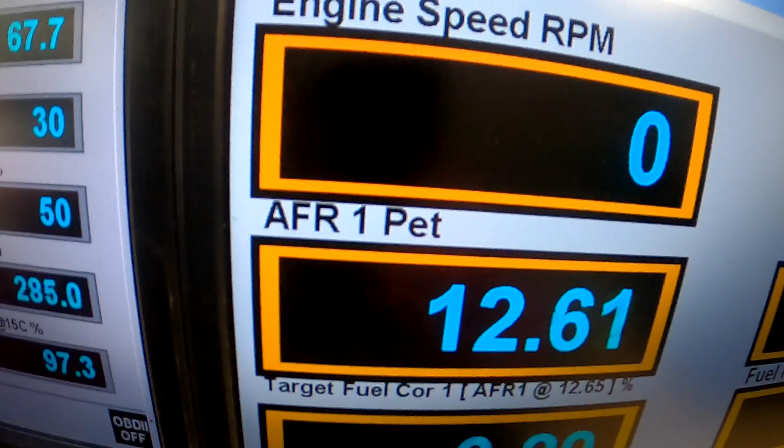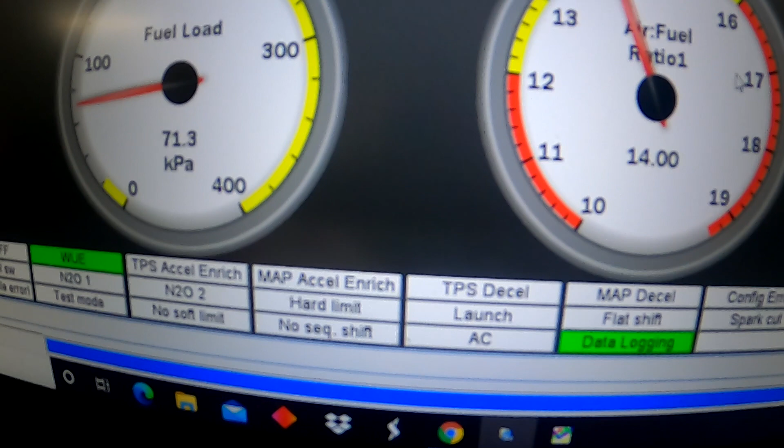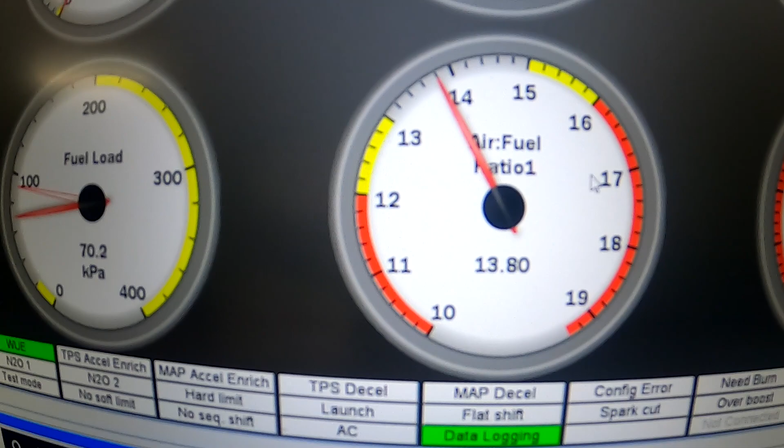Alright, so problem number one, I didn't have a whole lot of faith in the wideband that's in the car. Mine's reading basically 1250 or so, 1260. I'm reading like 14, 13. Now it even looks like it's stuck. Widebands aren't even on the same planet as one another. I know mine's good, so I'm just going to turn off any closed loop we got going on with this one, and I'll just use mine. So just that in itself is probably going to make a pretty big difference.

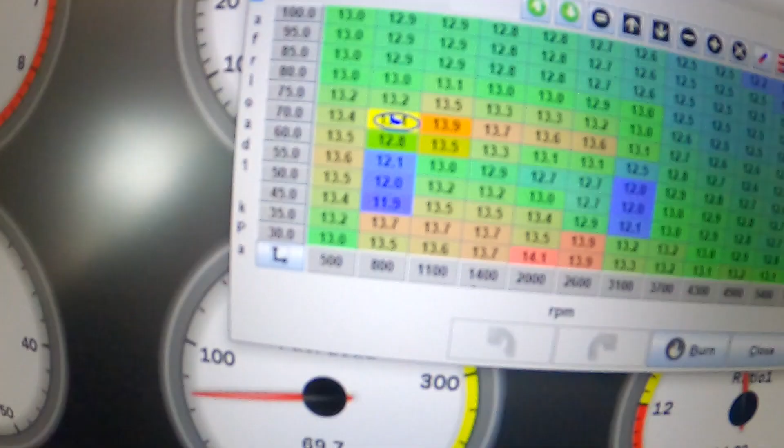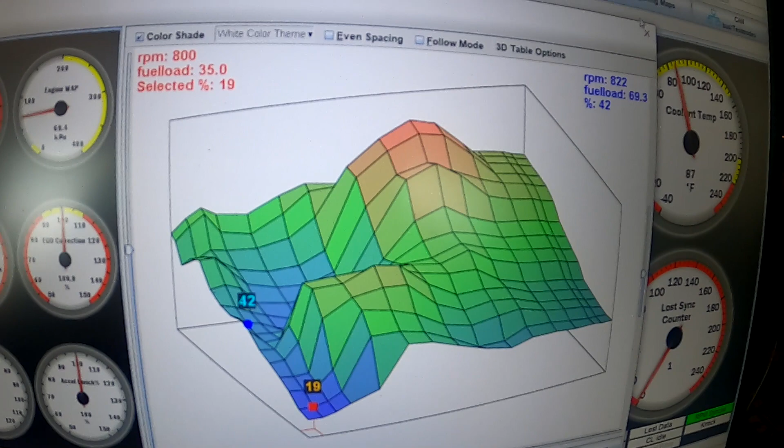So here's the Target Air fuel table I was talking about. You can see it's basically like you're just trying to hit a moving target the whole damn time. So we'll flatten that out and make that a little more reasonable. And the VE table looks a little crazy. That's the actual map. So just looking at that stuff, I'd like to hope and think we can make this one run a little bit better. This thing's taking forever to warm up.

I think what I'll do is just make a run as is, see what kind of power it makes, and then we'll see if we can improve it, and then we'll have a better idea on what the air fuel and stuff is doing. Now we have no idle control valve. This is not sequential, so we don't have any cylinder to cylinder adjustment, and we actually have no ignition control. So basically we're just doing fuel tuning. You know, we got our acceleration enrichment stuff and our VE table, and that's really about it. So on one hand it makes it easier because there's less to adjust, and on the other hand it makes it a whole lot harder because there's nothing to adjust. So we'll see how it goes.

Oh yeah, the shifter's all messed up, so it's super hard to find what gear you're in. And it runs way worse than I was expecting. But I thought it might make a little more than that. Smoke like crazy.

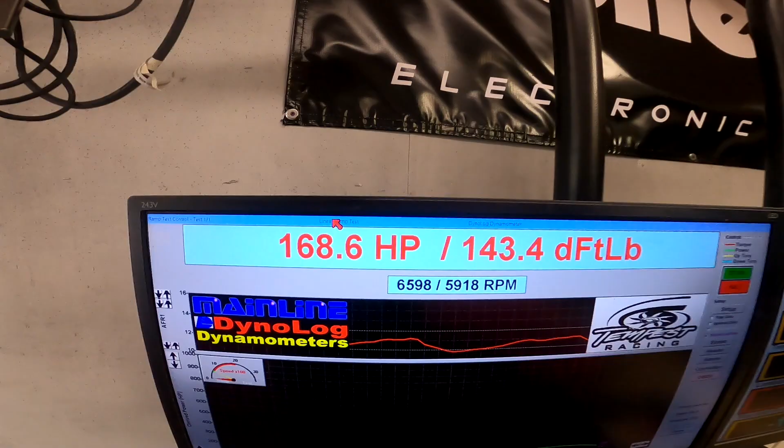This thing runs way too rough since there's no intake manifold, and it was set up in speed density mode. There kind of really wasn't enough adjustment, so I've switched everything over to Alpha N, and I'm just going to completely start all the way over again. Alpha N's kind of a pain in the ass to work with and takes a lot longer, but I think it's going to make the car run better.

It'll probably take a little bit to kind of rough this in and get it in the ballpark, but it starts and runs so far, and already feels a little bit better at tip in and stuff, so I'm going to fool with that. Just sitting here stationary, got it revving a whole lot cleaner now. Before it would stumble just trying to free rev it. And that's just all in the fuel table. I haven't touched any acceleration enrichment yet.

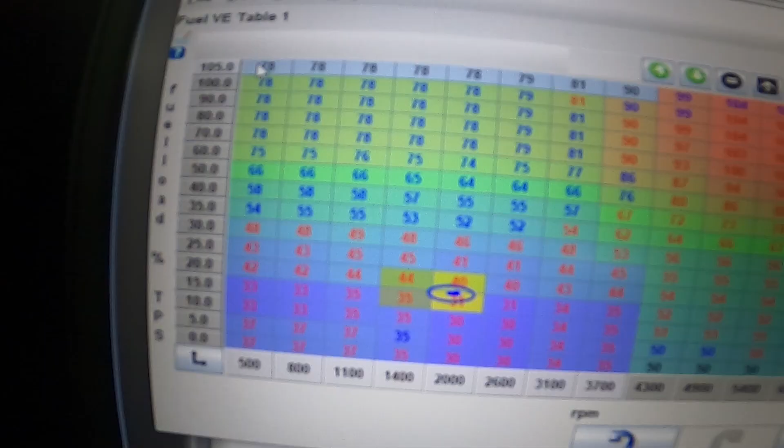So probably throw it in gear, and who knows, everything I just did might change once we're in gear, but we'll start rolling it now. So I'm holding the dyno at 2,000 RPM and then can just cruise through all of the cells.

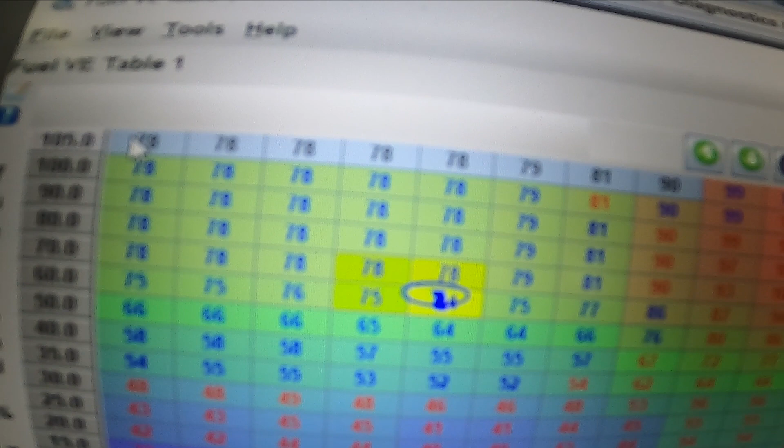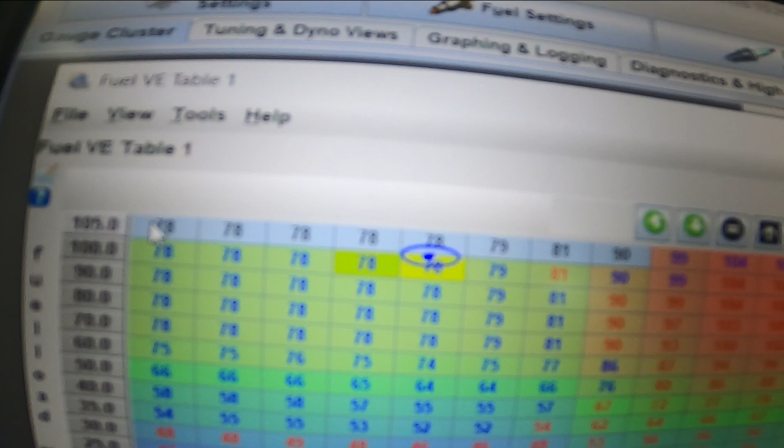Started at 2,000 RPM. Each car's a little different on how low you can go. And so I'm gonna try 1,400 RPM now, and then we'll just kind of keep going up. I don't start at the lowest point because some cars get a little grumpy down there. So 2,000, 2,500, wherever. Again, depends on the car. So go as low as I can go, and then we'll start going the other direction with it. But so far, it seems to be running a lot better.

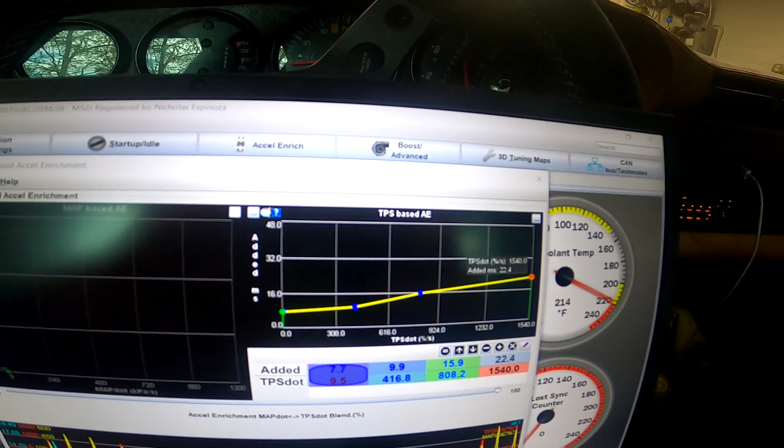Got the off idle stumble to go away. I'm gonna try and make another full throttle run, and I'll just go until the air fuel tells me to stop. I don't suspect I'll be able to make a full run the first time. Starts nice. Damn it. Keep forgetting it takes 20 minutes to find fourth gear.

Check this log out, but basically it looks like I'm gonna be pulling kind of 10-15% out everywhere, but tend to start rich on purpose.

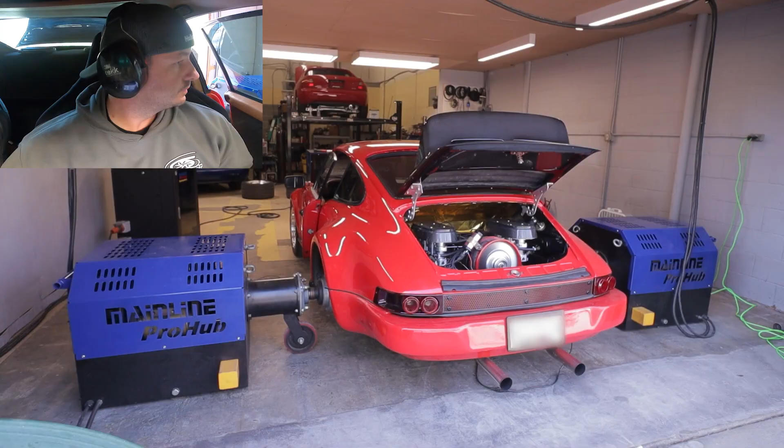I'm gonna try and make another full throttle run, and I'll just go until the air fuel tells me to stop. I don't suspect I'll be able to make a full run the first time. Starts nice. Damn it. Keep forgetting it takes 20 minutes to find fourth gear. Check this log out, but basically it looks like I'm gonna be pulling kind of 10-15% out everywhere, but tend to start rich on purpose.

Today's episode of what in the hell is going around this dumpster fire of a place. The only way to take care of this building is for somebody to just drop a nuke on the whole damn thing and just get it the hell off the earth.

It is off. You know, it wasn't a flat number. I think the peak was about 12, so I took about 9% out of it, and we'll try it again.

I don't fit in these seats at all. Every time I get in, I just like blow my nuts up in between my legs. It's no good.

Well, that didn't really go as planned. I leaned it out more than I wanted in the middle, and then didn't do a whole lot on the left and the right side. So no big deal. Might just take a few revisions. So my suspicion or expectations here were pretty spot on, I guess.

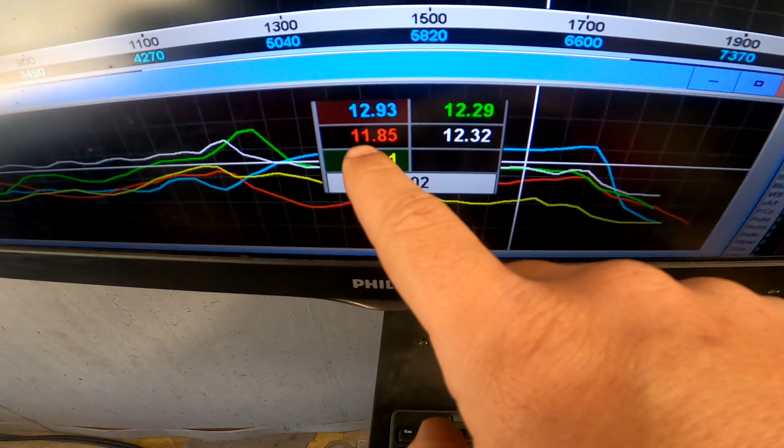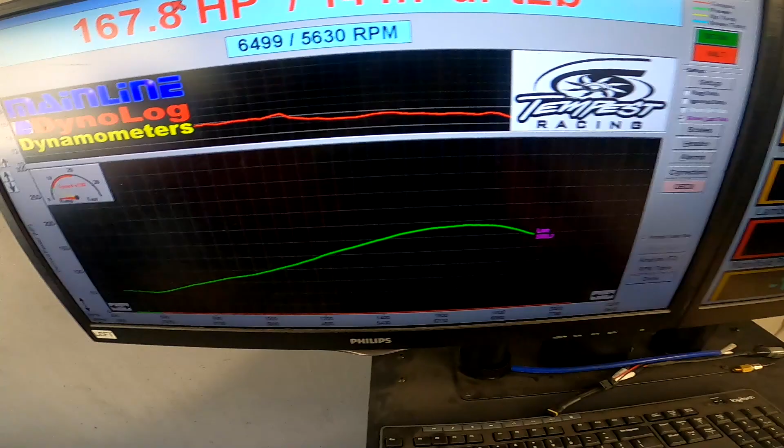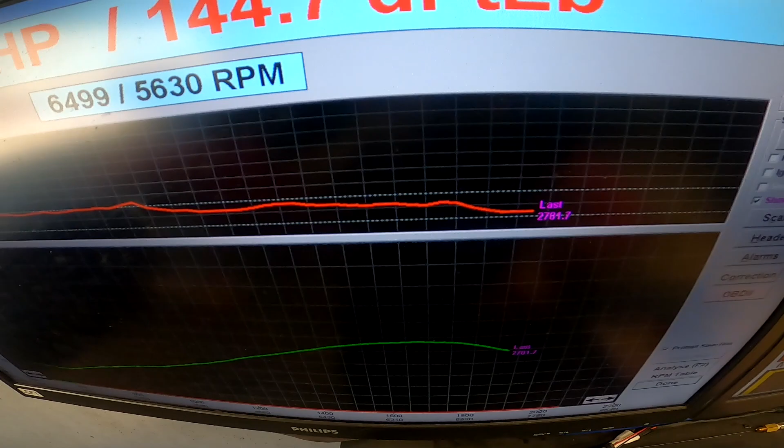We've tried every different air fuel ratio there is, and our horsepower is within like 1 or 2. So there's not much there. But we did go from a pretty sporadic looking air fuel ratio curve to now we're pretty flat. And up here it goes fat because it's just going from like 20 something degrees of timing to like 5 degrees of timing. And there's just no power there. It's just laying over like crazy.

So I'm not gonna pull a bunch of fuel out there because he can send the distributor out, have that kind of remapped or whatever you want to call it. And we might try this again, but seeing what the timing is, I think there's definitely some power there, but I'm kind of just out of things to play with. So I'm gonna tinker around some more with the part throttle stuff and some tip-in whatnot. That's kind of what the main concerns were here anyway, so we'll play with that a little bit more, and then we're gonna call this one good.

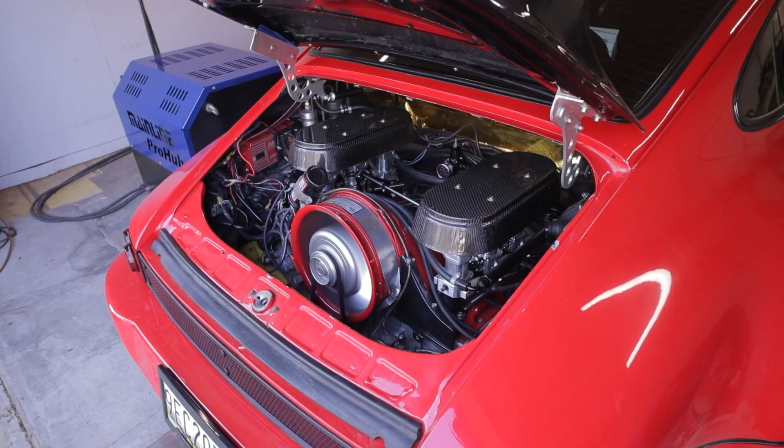A little bit more. Air fuel's way flatter, runs way smoother, starts way nicer. So even though we didn't pick up 1,000 horsepower, I think this was still a success. Up into the 170s now at least.